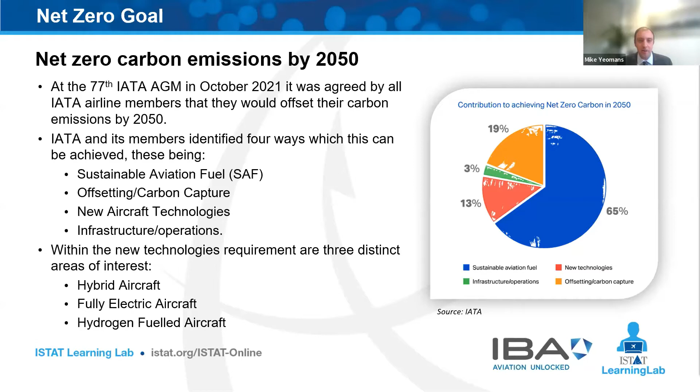But more heavily, the area we're going to focus on being ISTAT appraisers is the new aircraft technologies. And within those, there are three distinct areas that we're interested in: the hybrid aircraft, the fully electric aircraft, and the hydrogen fueled aircraft. So we're starting off really in the sort of size building from the smallest aircraft up, and we're going to focus on some of the different technologies that are being used and being developed.

So with that, I'm going to pass over to Kim, who's going to talk you through the electric and hybrid electric aircraft technologies. Thank you, Mike.

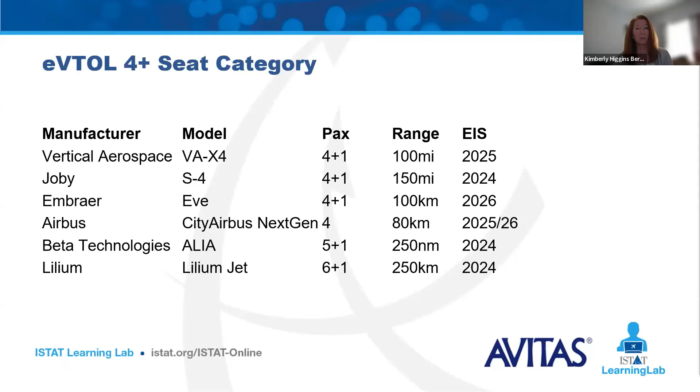So I have to admit that one of the favorite parts of my research here was finding all the images. These aircraft are beautiful and futuristic and sleek, and it's just enjoyable to see how they all differ from one another. But the Vertical Aerospace VX4 will have 4 passengers and a pilot. Initial version will be passenger with medevac and cargo configurations to follow. Maximum range of over 100 miles.

One interesting fact is that they just announced a deal with Leonardo to co-develop the carbon fiber fuselage. And in the announcement, they disclosed that they propose a potential production rate of up to 2,000 aircraft per year. So when you look at what Boeing and Airbus are producing, this is just one of the entrants in this space. If they really produce 2,000 aircraft per year, there will just be thousands and thousands and thousands of these eVTOLs occupying the skies. So the first flight of the prototype is expected later this year with the entry into service forecast for 2024. And they have a pretty decent provisional order book, over 1,300 aircraft as of last September.

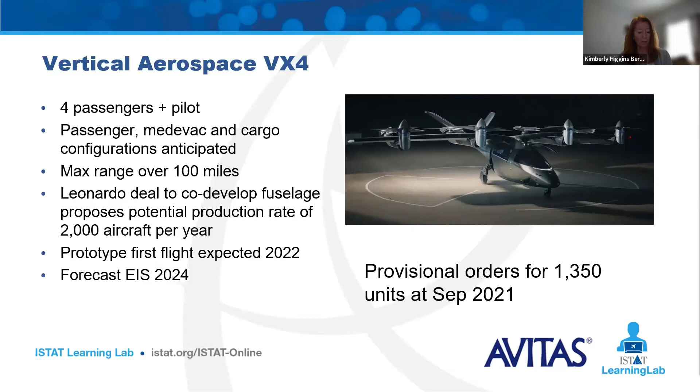So the Joby S4, which has been in the news lately, has 4 passengers and a pilot. 6 propellers will tilt to transition from vertical takeoff to conventional forward flight. Maximum range of 150 miles.

There are a few interesting facts about the Joby program. They're actually designing the motors and propellers and are certifying these systems concurrently with the aircraft design. They've also been working with the FAA, and they're designing the aircraft under FAA Part 23 rules for normal category airplanes with some special conditions that cover the additional capabilities to include the vertical takeoff and landing and the electric propulsion.

This makes the certification more straightforward, and it's a well-defined process that allows the use of existing commercial pilots and flight within the existing air traffic control system. So it should hopefully streamline the process for them. They did just add a second flight test prototype aircraft earlier this year. Unfortunately, about a month later, the first prototype aircraft was involved in an incident and crashed. It was being piloted remotely, so there were no injuries, but there's obviously an investigation ongoing. So it's unclear at this point in time what happened or if this will affect the timeline for entry into service, which was forecast for 2024.

The other interesting thing about Joby is that they're not intending for the individual aircraft to be available for sale. They're going to operate the fleet via Part 135 certificate in the US as a rideshare business. And they've also announced collaborations with ANA Holdings in Japan and SK Telecom in South Korea to offer rideshare services in those countries.

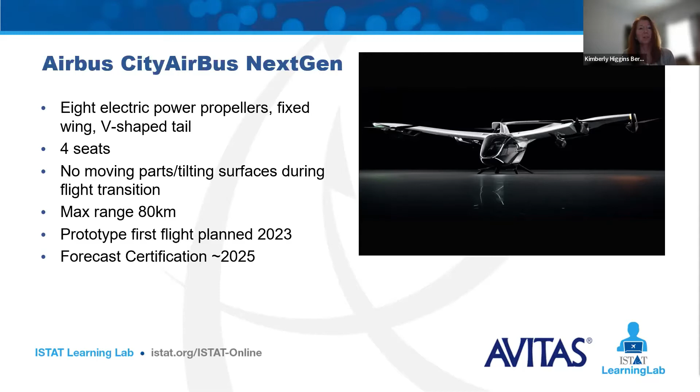So we have the Airbus City Airbus Next Gen. This is the follow-on to the City Airbus. It's got 8 electric power propellers, fixed wing, V-shaped tail, 4 seats. Interesting, they chose to go with no moving parts or tilting surfaces during the transition from vertical takeoff to forward flight. Maximum range of 80 kilometers with the first flight of the prototype planned next year, and certification forecast around 2025 with probable entry into service in 2026. It's being developed under the Airbus Helicopters organization.

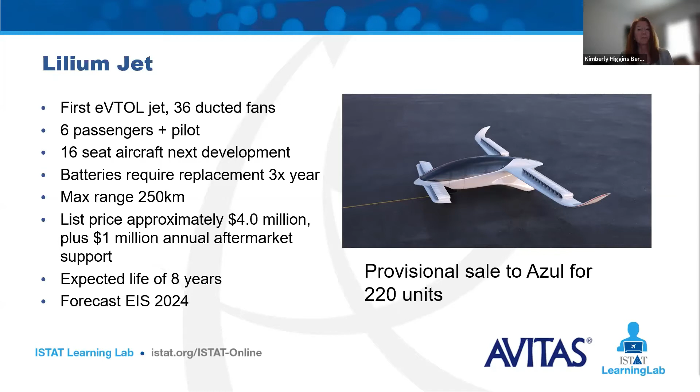There has been a little bit of controversy over the design range, which they list at 250 kilometers, because they were assuming a higher battery density of 320 watt hours per kilogram, whereas the currently available battery density is generally in the 250 watt hour per kilogram range. But the company says that the batteries they've selected have been bench testing at 330 watt hours per kilogram. So if that holds, then their range estimate should be good. They've had a provisional sale to Azul for 220 units. If you could go to the next slide, please.

The aircraft was initially developed for a cargo configuration, but then passenger orders were received from Blade Urban Air Mobility, so they're going to take 20 of the aircraft. UPS has a big order in with options to buy up to 150. Their first aircraft are scheduled for delivery in 2024.

So it's got a vertical takeoff and landing with conventional horizontal flight, with 4 top lifting rotors and 1 rear-mounted pusher motor. The payload is 200 cubic feet of cargo volume with 1,400 pounds of payload, or you can take 5 passengers plus a pilot, 6 when autonomous. Maximum range of 250 nautical miles.

The list price is expected to be between $4 and $5 million. In addition to the order from UPS, Amazon is also an investor in this company, as well as Fidelity Management. They also have been working extensively with the Air Force and have been awarded contracts over $43 million to test these aircraft for military applications.

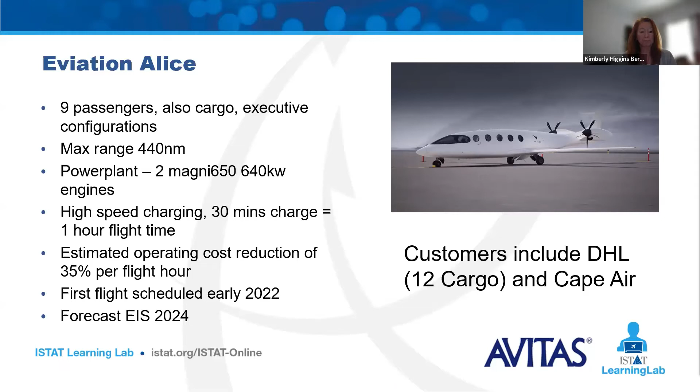The Airflow M200, another interesting platform because it's available with amphibian or fixed gear options. It's effectively a utility aircraft designed to replace or compete with the Cessna Caravan. 9 passengers or 2,000 pounds of payload, max range of 500 nautical miles.

This one is hybrid electric, so there's a turbo generator that powers the distributed electric propulsion. This is just an artist rendering, so it's unclear at this time whether those are actually going to be 10 propellers or 8, but it's going to be a similar setup regardless of the number. The list price is $2.75 million, and it's forecast to enter service in 2025.

They have a $600 million order book reported, which includes orders from Ravn Alaska and Tailwind, which is taking the aircraft in amphibious configuration.

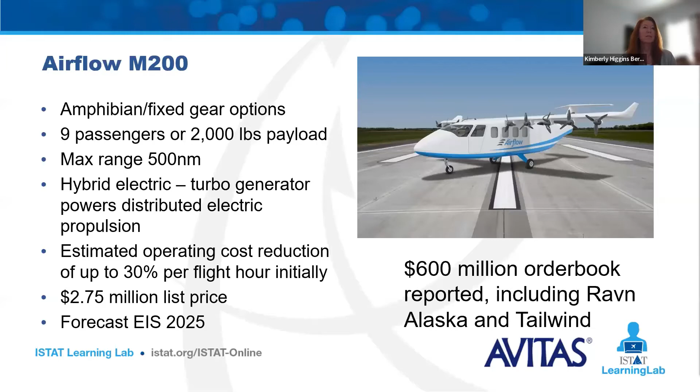Another really interesting platform, the Regent Viceroy. So Regent isn't a company name, it's an acronym, which stands for Regional Electric Ground Effect Nautical Transport. This is not an aircraft, this is a sea glider that operates in wing and ground effect.

The process is it will motor away from the dock on hydrofoil, take low speed takeoff over water, and then cruise will be up to 180 miles per hour.

This will not initially be certified by the FAA. It's going to enter service under Coast Guard authorization, and it's forecast to enter service in 2025. I believe the flight test will be later this year in Tampa Bay.

And Mesa recently announced plans to invest in the company as well as order 200 of the sea gliders.

The Tecnam P-Volt. This is an electric powered version of the Tecnam P2012 Traveller platform. Can carry 9 passengers, also available for cargo, medevac, or special mission configurations.

The Traveler was certified a few years ago, and 37 have been produced, 30 of which are with Cape Air, either in service or in storage.

The maximum range might be a bit of an issue on this. It's 85 nautical miles, so that's going to significantly limit the number of routes that can be flown with this.

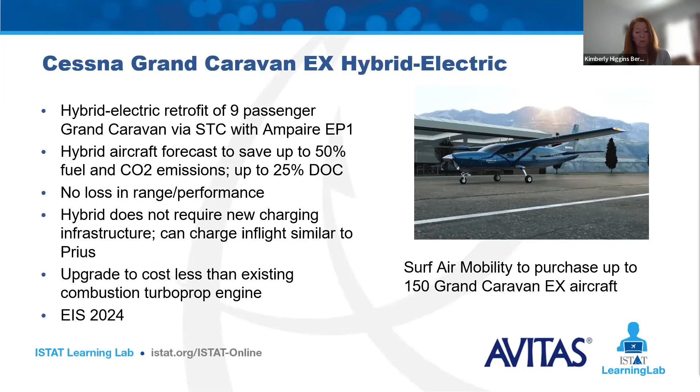They've also announced orders for Grand Caravan aircraft, 100 firm orders and 50 options, and they're going to take these aircraft into their fleet, and once the STC is available, they're going to re-engine them with the Ampaire power plant. Textron's actually supporting them in the STC process, and they will also support them with sales and marketing outside the US once the certification is achieved.

So here we have the 19 seat and up category, and as you can see, the offerings get slim because the battery technology doesn't really support the performance needed to carry more passengers, but there are a couple of entrants in here.

The Heart ES19, which is a 19 passenger platform. That picture is of a subscale prototype.

Maximum range of 400 nautical miles. It does have high-speed charging, so 40 minutes to charge for the average mission. The battery life expectation ranges from 1,000 cycles, most likely, but may increase up to 3,000 cycles. Interestingly, they say the battery is expected to be approximately 2% of the total aircraft price. So that's either a pretty inexpensive battery or a fairly expensive aircraft, but we don't have a list price for them, so it's hard to determine at the moment.

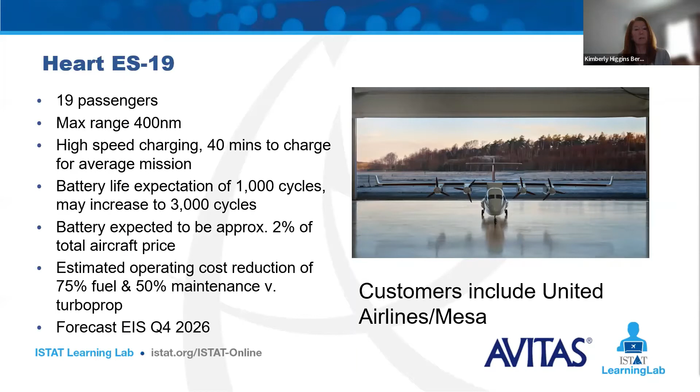The forecast entry into service is fourth quarter 2026. So this one's a bit farther away, and customers already include United Airlines and Mesa. If you could forward to the next slide, please.

Then we have the Faradair BEHA M1H. This is a hybrid electric aircraft, has multiple uses. There's a 19 passenger configuration. It can convert to cargo in 15 minutes under the QC configuration. There's firefighting, regular just passenger. The cargo capacity is 3 LD3 containers, 450 cubic feet of payload up to 5 tons with a maximum range of 1,100 nautical miles. 2 Magni 650 engines are the power plants.

The target list price for a base spec aircraft is $6.3 million, but the initial portfolio of 300 aircraft is going to be owned by Faradair and leased out to operators. They're saying it'll be 150 firefighting aircraft along with 75 in QC configuration, 25 in cargo, and 25 in other. I'm not sure if there's already some deal in place for the firefighting aircraft because that seems to be a fairly high percentage of a new fleet to go to firefighting, but I guess time will tell.

Forecast entry into service in the 2026-27 timeline. Go to the next slide, please.

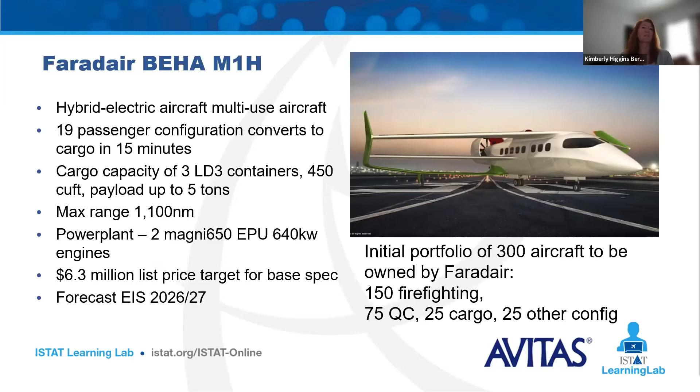And finally, we have the Eco Otter SX, which is a NASA project in conjunction with Ampaire, which is providing the engine technology to re-engine the Twin Otter aircraft. The idea is to see if this electric engine capability can be scaled to serve larger platforms. So it's unclear if this will be offered on a commercial basis, but it is out there and interesting, and the Twin Otter fleet just seems to keep going and going.

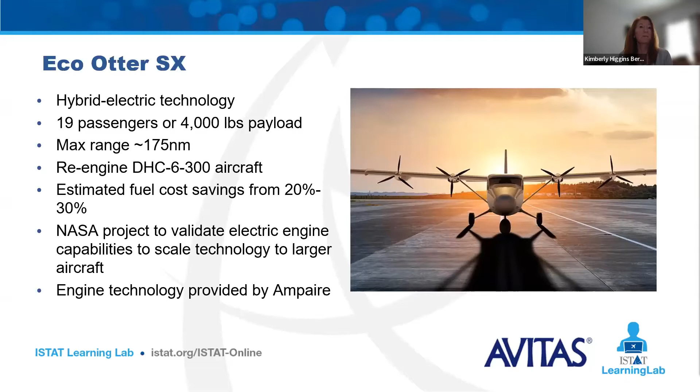So what are some of the challenges ahead? Batteries, the cost, the infrastructure, air traffic management, pilot shortage, all of these things are facing the electric aircraft market, and some of them are also facing the conventional aircraft market. Go to the next slide, please.

So the batteries is a big thing. The battery density is currently the main limitation on performance for these aircraft. Most of the platforms are using existing automotive battery technology, which, as I mentioned, is about 250 watt hours per kilogram. But there's actually been a recent development where a new lithium air battery is being developed by Japan's National Institute for Materials Sciences, and they're claiming 500 watt hours per kilogram with charging and discharging at normal temperatures. So if this performance holds on the battery, this could actually be a big step forward for the electric aircraft market because it's going to double your capacity.

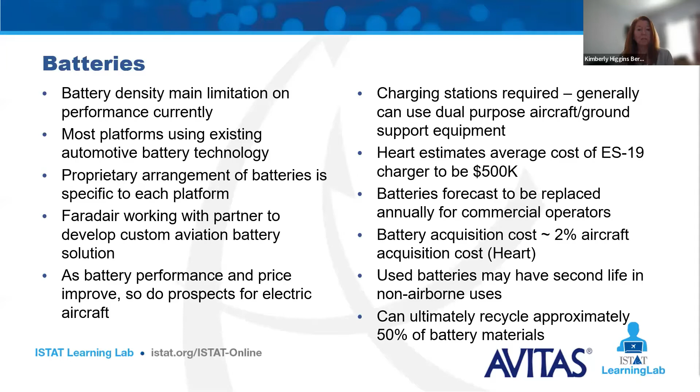So performance: the payload and range are reduced when you switch to electric power on a conventional platform. The conventional aircraft configuration isn't really optimized for battery packages. The outlier here so far appears to be the Cessna Grand Caravan because there's no loss in range, but it's actually a hybrid electric, not a fully electric aircraft. When you look at a fully electric aircraft like the Tecnam P-Volt versus the P-2012, there's an incredibly significant loss of performance on the range.

The P-2012 Traveler has a 950 nautical mile range, and you get reduced to 85 nautical miles with today's technology. Now they're projecting in 2030 that will increase to 145 nautical miles. So it's still such a huge performance hit when you go to electric on a design that is not clean sheet.

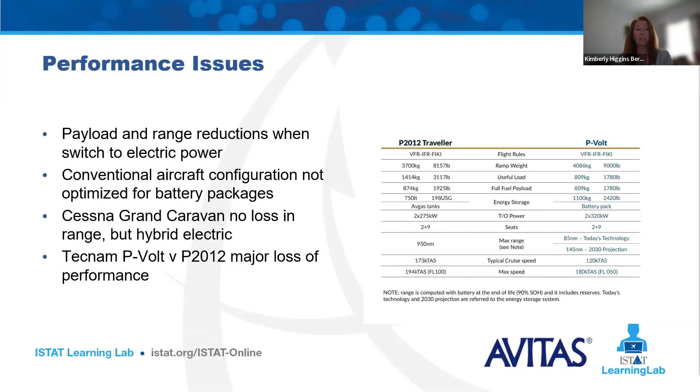So infrastructure is an issue. Many of the electric programs need commercial charging equipment that's not specific to their platform, so that's encouraging, but there will still be some airport adaptations required for the conventional fixed wing aircraft. It's unclear who will pay for these at this point, if it will be the operator, the airport, or some combination. eVTOLs are a whole different story.

They're going to require vertiports. They can probably use existing helipads to begin with, but there's going to be such a huge volume of eVTOLs that they're going to need more landing sites. So some are looking at rooftops as an option, but others will be new sites that will have to be built and presumably certified in some manner.

Air traffic management: this is another issue that will be generated by the massive increase in vehicles in the skies, but could affect all of the participants. The Bureau of Labor Statistics forecasts only a 4% growth in air traffic controllers over the next 10-year period. Who is going to manage all of these aircraft flying around?

The good news is the eVTOLs, because they have such limited range and short route profile, won't need to fly very high, but they're still going to be in the sky. So NASA and the FAA are working on all kinds of programs together. NASA has this air traffic management exploration program, and they're trying to develop new solutions with digitally integrated air traffic system to accommodate all of the users.

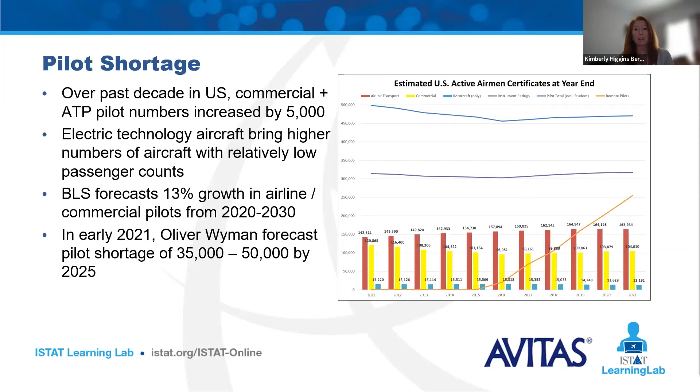So the pilot shortage: Vertical Aerospace proposes a build rate of 2,000 aircraft per year, one platform. Who's going to fly them? Initially, at least, most of these platforms are going to be piloted. So some operators are taking matters in their own hands.

Joby and United are both developing pilot training programs. Joby has started ground school for its employees with the idea of transitioning into flight school for its employees first, and then for Joby pilots. United has established a pilot training academy in Arizona, and they expect to train 500 pilots per year. They just ordered 25 Cirrus trainers with options for more. Another thing that we can do is lobby for change in the regulations.

Mesa Airlines CEO has been in the press lately arguing that the 1,500-hour rule needs to be reduced because it's causing problems in getting air transport pilots certified. A very innovative solution is the Regent Sea Glider, which actually requires boat captains instead of pilots. So that's one solution, albeit a very small one.

But essentially, autonomous aircraft are going to have to be a large part of the solution. These platforms almost all initially plan to certify with pilots, but they all generally admit that the economics really begin to work once you remove the pilot and have that extra passenger seat available. So the question is, will this open the door to single pilot or autonomous operations of larger commercial aircraft one day? Not today, probably not tomorrow, but maybe one day.

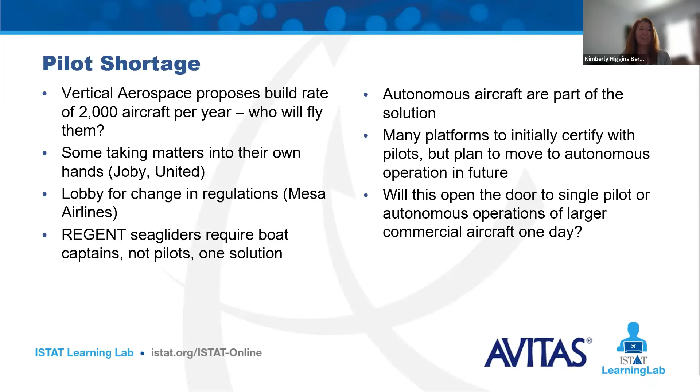Really interesting to see how many different aircraft models and types there are in development, and the different technologies being used there. You can see how the skies could be quite congested if all of those are delivered in the numbers you said. So in the next few slides, I'm going to talk through some of the potential technologies that could be applied to the largest of commercial aircraft market.

I'll start off by looking at some of the OEMs and how they are investing in decarbonization and what strategies they're taking to achieve these net zero targets, which are faced and committed to by the airlines. There are some different concepts and approaches to this. Airbus is really going all in on hydrogen technologies with its zero emissions concepts. Currently there are 3 aircraft proposed, which we'll dig into in more detail in a few slides, expected to enter service around 2035.

Boeing's taking a little bit of a different strategy. They're less convinced on hydrogen technology and are placing more emphasis and investment into sustainable fuel at the moment, although they are invested in urban air mobility, which is what Kim was mentioning earlier in the presentation. That side of the market is highly competitive, as we saw in the number of different aircraft types that will be entering service over the coming years.

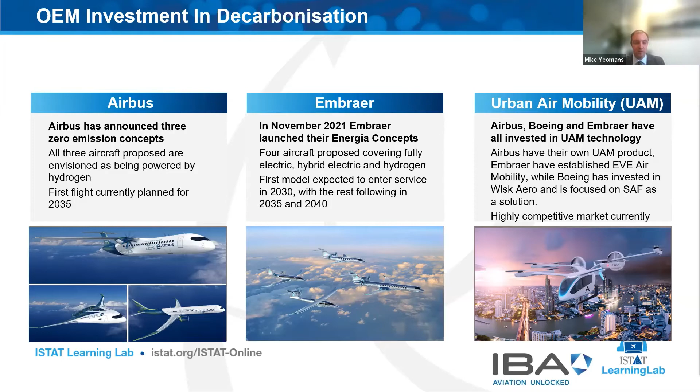Embraer, as of late last year, launched their Energia concept. There's a 4 aircraft family which covers various different technologies, looking at fully electric, hybrid electric, hydrogen, using both fuel cells and a gas turbine. Some very interesting technologies being used there, and those should enter service between 2030 and 2040 across those different aircraft types and technologies.

So technology is clearly one way that we're going to achieve the target, but as you saw from the earlier IATA slide, sustainable aviation fuels are going to be very much a near-term solution to becoming carbon neutral for the large aircraft market.

These are fuels that can be burnt in the same way as Jet A1 and fossil fuels, but they come from a variety of sources: plants, plant oils, cooking oils, various forms of waste, rapidly grown plants and algae. And they're becoming more and more common. We saw BA operating its first sustainable aviation fuel flight last year in 2021.

IAG is committed to powering 10% of its flights by 2030 using sustainable aviation fuels. And within Europe, there is a significant commitment from the political and governmental level to using SAF. There's a mandate starting in 2025 that 2% of all flights departing EU countries will be required to have 2% SAF content. That's going to increase over the coming years in 5-year increments, such that by 2050, 63% of aircraft will be powered by SAF. Some significant targets there.

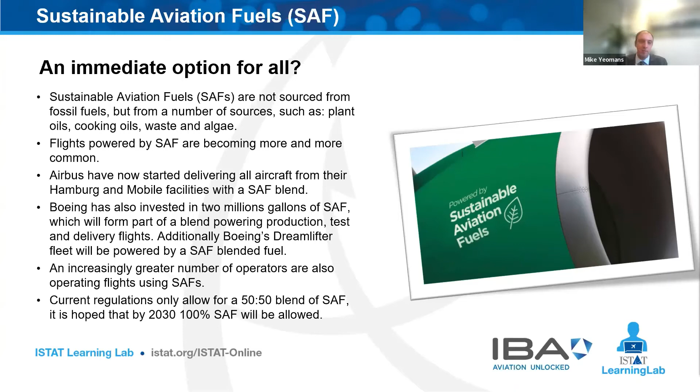So is it an immediate option for all? Well, production facilities at the moment are limited in terms of capacity. The cost is around 4 times higher than conventional fossil fuels, so not so much of an option for all on that basis. The IATA forecast is that by 2035, production will allow for 17.5% of all global aviation fuel to be sustainable.

Now, there is some controversy, some concerns around sustainable aviation fuel and how sustainable it really is. One of those arguments is land use. It does require some types of sustainable aviation fuel to set aside large volumes of land to grow the crops that you then turn into fuel. Could that be used for an alternative use? Could it be used for growing food? Could whatever you're growing on that land be sequestering CO2 from the environment anyway, that you may then not burn in the engine of an aircraft?

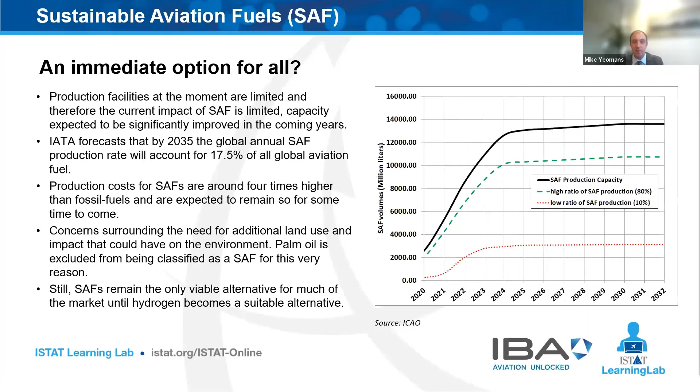So there are some questions around it. But when we look at the technology that's available today, and that's going to be available over the coming years, it still has to be an important part of the solution to getting to these ambitious net zero targets that the industry has set itself.

So how are the airlines going to address these targets? Well, sustainable fuels, just mentioned, that's going to be a key part of it, and certainly in the next 5 years, but that will continue over the next 20 years realistically, and the use will increase. We already have technologies in place, aircraft like the Boeing 787 using the more electric principle, using less bleed air systems, using more electrical systems on the aircraft to reduce fuel burn effectively. So there are already some technologies in place that look at that.

Improving the air traffic management and the flight profiles, so we're avoiding contrail formation, more direct routing, less time holding to go into the airport, which has been less of a problem over recent years, but was certainly a big issue at some of the busier airports pre-pandemic. So making better use and advancing those systems.

There's research that's done by Airbus around fello'fly, so flying like geese in formation to make use of the trail behind the aircraft in front to improve efficiency. Whether that will take off, we'll see.

Carbon offsets are going to be a key part of this. That's going to go right the way through the 20-year forecast. But then once we get 5-10 years into the future, we expect to see more, as Kim has mentioned, some of those smaller hybrid electric regional aircraft, a fully electric regional aircraft. We'll see the sustainable fuel network and the supply of sustainable fuels growing.

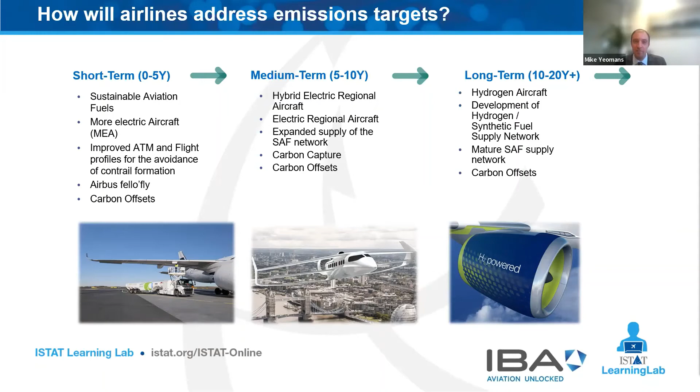Just to take a little look at each of the technologies, we've gone through some there on Kim's slides. So hybrid, is it a niche? Is it going to be suitable for applications in large aircraft? Well, when compared to electric, compared to hydrogen, sustainable fuels, it does look like it's going to be more of a niche application. Currently, we've seen most of the power plants, most of the technologies being employed in the smaller aircraft, the largest of those being up to really the 19-seater.

We did see Airbus pursuing with its E-Fan and E-Fan-X programs, the hybrid in development with Rolls-Royce. It's since left that by the wayside and moved more towards the hydrogen applications. So in terms of a broader use in the large aircraft, commercial aircraft market, don't really expect to see hybrid technology playing a big part.

On the right-hand side of the screen, you can see we've listed a few of the aircraft employing these technologies. Kim's gone through some of those already, so I won't go into great detail, but one of the Energia models, the 9-seat E9HE, will be hybrid powered using piston and electric motors. The Tecnam, Rolls-Royce Rotax Tecnam aircraft, initially using a hybrid, then moving into the P-Volt as the fully electric version. Also Cessna looking at that, and Ampaire, as Kim's mentioned.

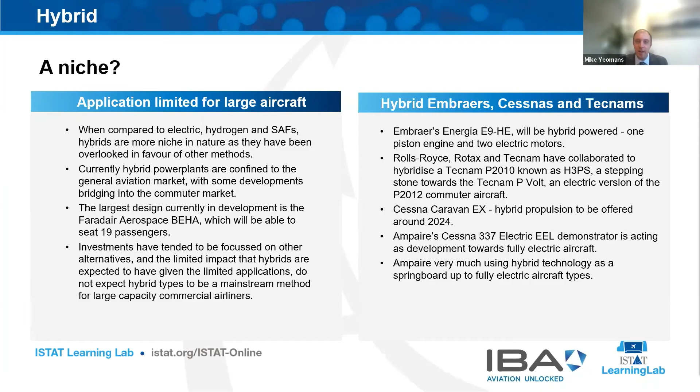Won't hang on those too much, as hybrid is not going to be so much the focus for the large aircraft market. But will the electric? I think in the fully electric market, we will probably see that confined to the regional and smaller regional market. As Kim's already put to you, battery technology and energy density is really an issue once you try to get aircraft up to a significant range. Jet fuel is 50 times more energy dense than batteries, so if you want sufficient range, you need a lot of batteries which are heavy. That's of course a limiting factor.

So for the established OEMs with larger aircraft, Airbus, ATR, they seem to be favoring hydrogen technology as a means of making their aircraft carbon neutral. So it's more likely that we'll see this in the smaller sub-20-seat aircraft market. We're seeing, though, that there is a market and there are startups going into this space. We've seen Ampaire, Eviation, Heart going into that sort of sub-20-seat market. There's a plethora of new power source OEMs as well, including Electroflight, MagniX, and Wright Electric, who are also developing aircraft. So in terms of application, it's going to be much more suited towards the smaller aircraft. So what is going to be the solution for the larger aircraft?

Well, it seems that, as well as near-term sustainable aviation fuels, hydrogen is going to be the way forward. Universal Hydrogen and ZeroAvia seem to be leading the way in terms of this development. There's testing on some of the larger turboprop types, ATR, de Havilland Dash 8. There's going to be options from both of these OEMs to retrofit aircraft with hydrogen fuel modules. So there's two ways you can use the hydrogen: you can either use it in a fuel cell, where it generates electricity that then powers motors to power the aircraft, or you can burn it in a gas turbine.

So these initial hydrogen hybrids, let's say, that will be powering the turboprop aircraft are likely to be more the fuel cell kind of applications. We've seen orders already placed for Universal Hydrogen and ZeroAvia for ATRs, Air Nostrum ATR as well, some of the orders that have been listed there.

So is it the silver bullet? You mentioned that it's probably the most suitable of these technologies for larger aircraft, but there are certainly some development issues and drawbacks. It's not yet a mature technology. The concepts, particularly from Embraer and Airbus, are not set to enter service at least into the mid to late 2030s. With new programs, technological developments, that can certainly push to the right.

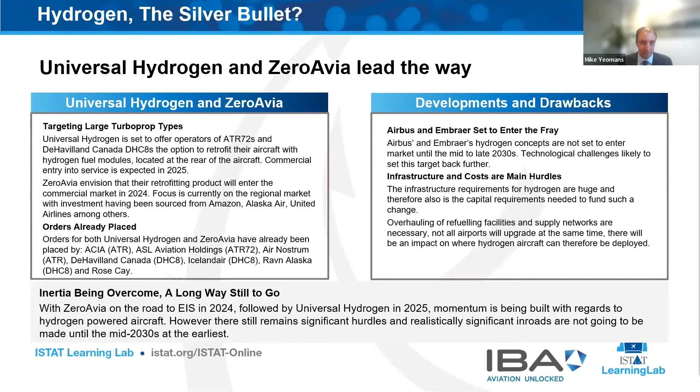I've chosen on the next couple of slides to focus on a couple of the programs that are looking at hydrogen. The Airbus ZeroE, as I said, Airbus has really gone all in on hydrogen. At present, there's 3 models that they're developing, which should be in service by around 2035. There's perhaps a potential for that to slip, but they do seem very committed to that target.

There'll be a turboprop model, likely up to 100 seats with a range of up to 1,000 nautical miles - that's the nearest picture on the right-hand side. There'll also be a hydrogen hybrid turbofan, a more conventional bodied fuselage design with up to 200 seats and a 2,000 nautical mile range, very much in the ilk of the A320 family, but hydrogen powered. You can see that aircraft being very successful if it comes into the market and is successfully developed.

And then there's perhaps a more futuristic looking hybrid turbofan blended wing, which would have up to 200 seats and a 2,000 nautical mile range. That perhaps gives some alternative options for storing the fuel, which is very important given the fact that you need a lot of space, given the low energy volume of hydrogen.

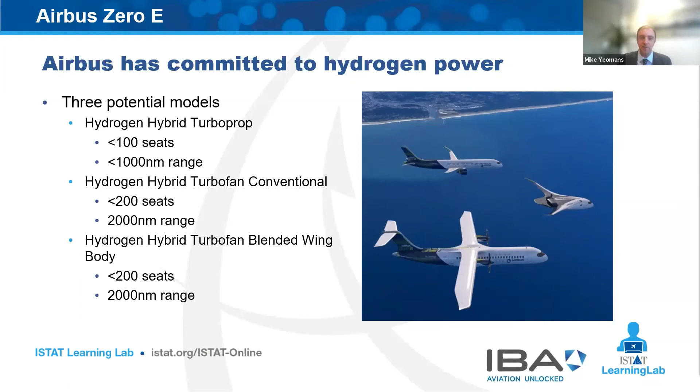When we look at what Embraer is doing, they have a 4 aircraft family that they're bringing into service, the Energia range. I've focused really on just 2 of the models, the larger models. This one's a 19-seat hydrogen electric fuel cell powered aircraft, with a range of 200 nautical miles. It's a somewhat shorter range on that aircraft, and a 19-seat capacity. It'll have 0 CO2 emissions and will enter service in 2035.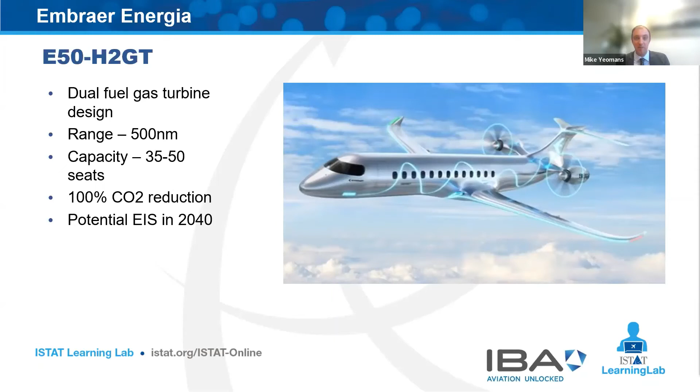On the last couple of slides, I wanted to look back at how long it has taken for aircraft programs to be developed, launched and brought into service. I've chosen the narrow body segment really as this is where I look to get to in the nearer term with some of these technologies. We're focused on the Boeing 737 product and the Airbus A320 family product. There's a few key themes that you can see through here.

Since the 1960s, typically the launch cycle, from the launch of one program or model to the launch of the next, has been around 15 years. That's very much true for the 737, slightly offset for the A320. You can see the initial launch in '84, and then you saw entry into service in '88.

Some of the new engine technologies, the A5 V2500 engine and the 5B in the mid-90s. You can see it for the Boeing as well. It launched initially in '64, the Classic in '79, the NG in '93. So it's very much been in that sort of 15-year, broadly speaking, period.

And subsequently from the launch, we've seen between 4 and 6 years for that aircraft to come into service. But one very important theme is that most of these new models have been an iteration, an adaptation, an improvement, and an evolution of the previous version. This is not what we're looking at in terms of the future with these new technologies. We're looking at very different technologies and a real paradigm shift in that propulsion technology for 100+ seat commercial aircraft.

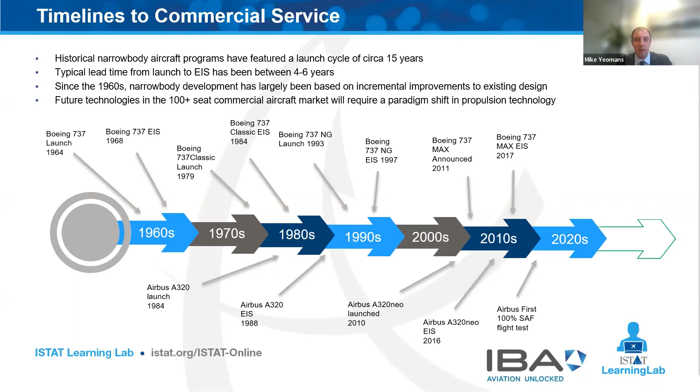So we can see that the time between the launch and the time when the aircraft is likely to enter service, given the certification, the research and development, is likely to be much longer. So looking forward over the next 20 to 30 years, we know that that timeline is going to be extended. These technologies are not mature, and particularly for hydrogen, there's going to be that very strong infrastructure requirement.

So just to give a timeline from 2020, really, we've seen some of these concepts launched, the Zero-E, Embraer launched the Energia concepts, and we should see some of the ground testing for the hydrogen technologies over the next 3 to 5 years. So that will set the way for further developments.

The ZeroAvia HyFlyer II aircraft, which are developments of the conversions of the Dornier 228, to be used as research and development for some of that clean hydrogen powered flight. So that will be relatively soon.

We're seeing Pratt & Whitney Canada developing hybrid technologies to power some of the Dash 8 aircraft, hydrogen technologies in 2024. We'll see '24, '25, Zero Avia, as I mentioned before, and Universal Hydrogen powering some of those larger turboprop aircraft. So we will see more hydrogen power, at least in this decade.

More so, I would say, in the next decade, where we'll see aircraft like the Wright Aviation Wright 1. We may see that as a single aisle aircraft, 186 seats coming into the market. That would be very key if that aircraft comes into market at that point. Zero Avia, perhaps with single aisle aircraft coming in the 2030s.

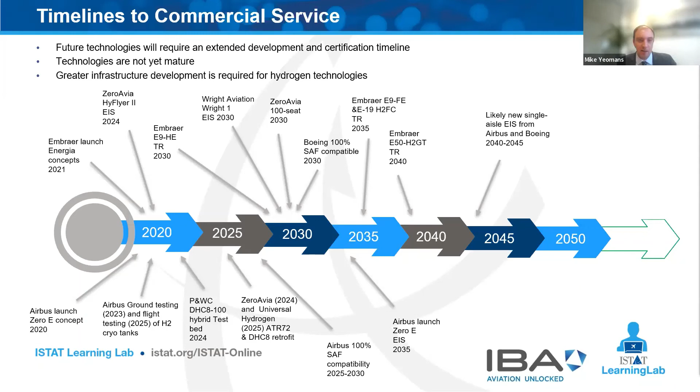So just on the last couple of slides, perhaps it would be remiss not to touch on aircraft values, being appraisers, and what might be the impact of these new technologies on existing aircraft that are in operation today. Well, from a narrow body and wide body product perspective, the impact is likely to be limited.

And we're not going to see these aircraft technologies that can replace these aircraft for, I would say, at least 20 years. Some of the near-term technologies in terms of sustainable aviation fuels are going to be compatible with those technologies, so they will be able to be operated using those fuels. So that 20 year timeline is longer than what we would typically have seen historically in terms of the replacement cycle. So that will feed into and support the value projections, at least IBA's value projections, from a base value perspective.

These are pioneering technologies. So as I've mentioned a couple of times, there is an inevitable delay, I would say, in terms of certifying and bringing those aircraft into market. We've even seen delays on existing technology, conventional jet-powered turbofan aircraft. So from those perspectives, IBA certainly don't see a risk for the existing generation aircraft, which are going to be the mainstay for the foreseeable future.

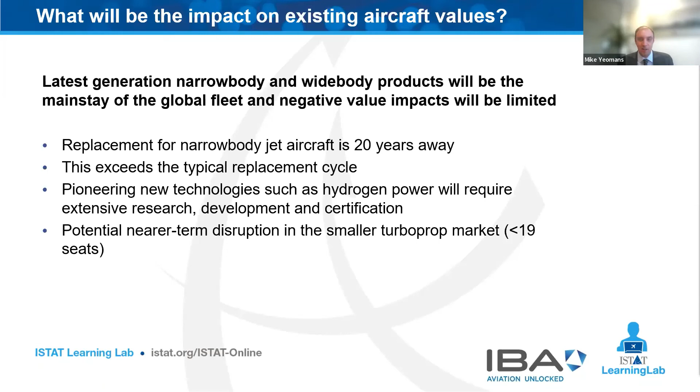And if Kim has any points you want to make against those on the existing technologies, she'd like to make some points on this next slide, so I'll hand over to Kim.

Sure. Thanks, Mike. The new programs and new technology may become challenging to value initially, because as appraisers, we prefer to use the comparables approach when data exists. We like to look at what the recent sales transactions or lease transactions are. And with these aircraft, we won't have that. We're going to have to look at other approaches, including the replacement cost approach or the income approach, potentially, depending on what the situation is.

Some of these platforms aren't even going to be made available for commercial sale. So if they're trying to get financing, we'd have to look at what that value is to the aircraft to them, in something like the case of a Joby.

So some of the considerations could include what are the cost savings versus your conventional alternative? Sometimes you're not really replacing a conventional alternative from an aircraft perspective. With these eVTOLs in particular, it's a replacement of a mix of ground transportation and helicopter usage, and just stimulating a new market. So the conventional alternatives may not exist in the like-for-like category. So you could look at the value in use, and you also might have tax credits or government incentives for some of these programs, because a new technology may require some assistance to get acceptance in the market. So it's really just not going to be as simple as prior valuation exercises.